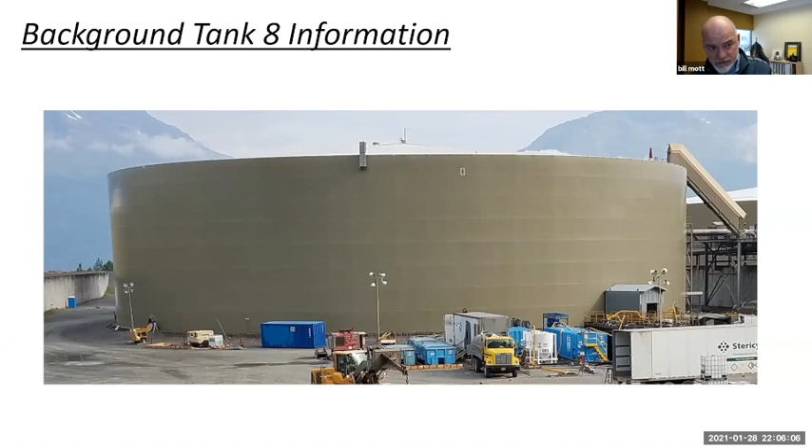Just to give you background on the API 653 inspections that are done: API is American Petroleum Institute. The standard 653 defines inspection and repair processes developed to reduce the risk of a spill or leak from an above ground storage tank, an AST.

API recommends annual visual inspections, 5-year in-service inspections, and periodic out-of-service inspections. For this study, we're referencing the out-of-service inspections. To conduct these, the tank has to be removed from service, drained, vented, and cleaned. The inspection visually assesses the columns, tank shell, tank roof, and tank floor, as well as the nozzles and some of the appurtenances on the tank.

The NDE of the tank floor garners most of the attention—it's where most of the leaks occur. NDE stands for non-destructive examination. Alyeska's floor plate inspections include mag flux leakage, which looks like an upright vacuum cleaner that runs around the tank and alarms when it sees areas of thinning. They mark that out, come back, and scan the area with ultrasonic testing, which gives a direct measurement of the remaining thickness.

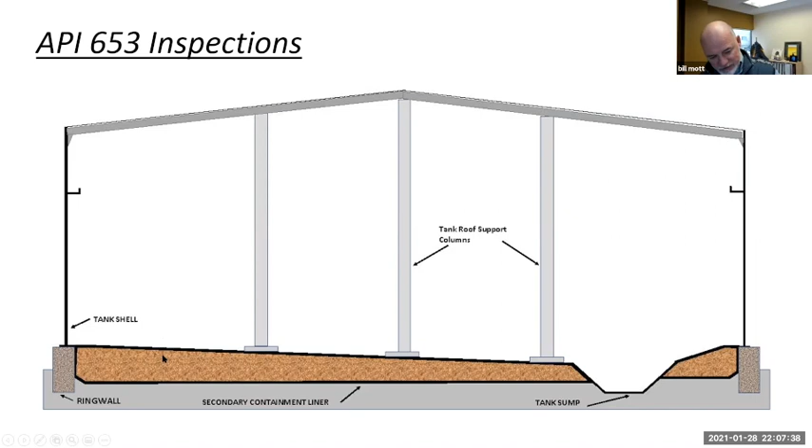Floor plates are typically repaired with an overlay patch they lay down and seal-weld onto the floor. I'm going to zoom in and look at one small area of the floor plate for a few seconds. This represents one small area of the floor plate. The original floor plate was 250 mils thick, or a quarter inch.

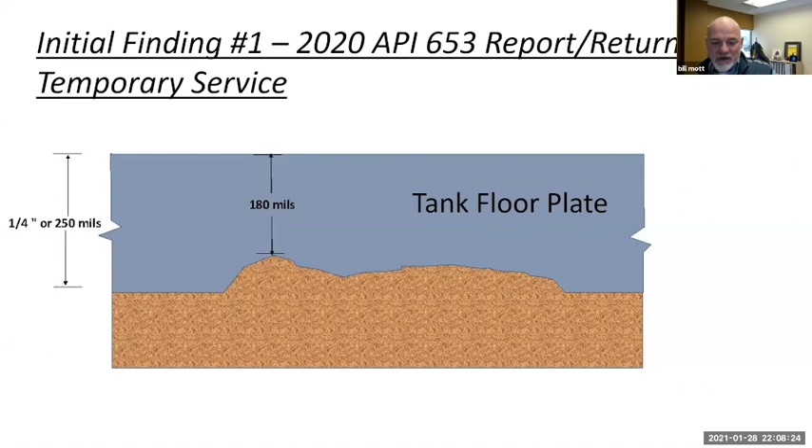The top side of the floor plate is coated, so we don't typically see any kind of corrosion activity on the tank side, the liquid side of the tank floor. The bottom side is in contact with soil, and that's where most of the corrosion occurs. The second API inspection that Alyeska conducted repaired the floor to a minimum of 180 mils remaining. So this might be what a typical remaining pit in the tank looks like—it's got 180 mils of steel left out of 250.

The code, the standard, requires that the owner plan to have at least 100 mils of floor plate remaining at the end of the next service interval. Alyeska started with 180 mils remaining to get them through to 2023, which is 4 years from when the inspection was done in 2019. So Alyeska's corrosion calculations assume the floor plate would experience 20 mils a year of corrosion for the ensuing service interval.

The reality is the actual corrosion rate on that tank has been closer to 10 or 11 mils per year. So I would expect that when they take it out of service, they're going to have somewhere in the neighborhood of 135 or 140 mils remaining on that floor. If you follow that little dotted line, that's probably what this pit would look like, but that's about what I would expect them to find when they go back in there.

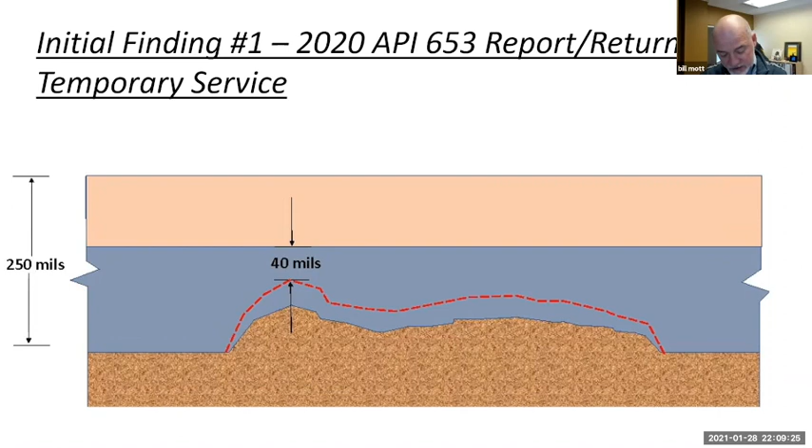So I think as long as the data was collected in a prudent manner, and everything I've seen on the second inspection suggests that it was, I think there's very little risk of a corrosion leak on that tank before it's taken back out of service in 2023.

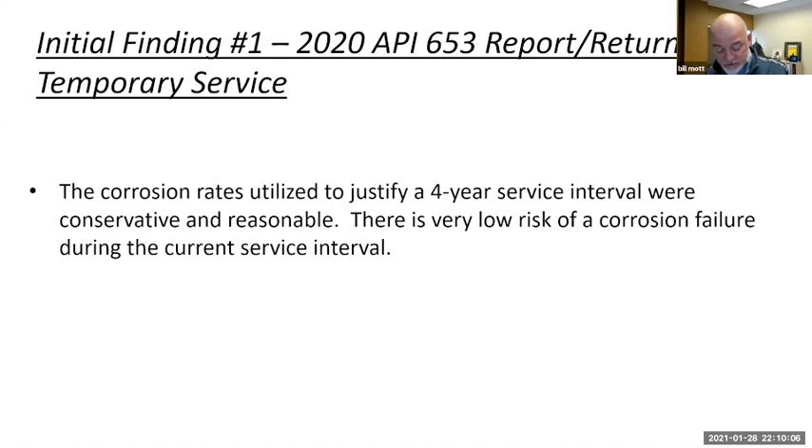One thing I didn't see: API 653 reports typically address tank settlement. There should be some perimeter assessments done on settlement, as well as internal localized settlement assessment on the floor. Especially in light of the November 2018 earthquake, I would have expected that to take a little higher profile. They may have conducted it, it just wasn't in their 653 report.

This is a simplified cross-section of what a crude oil tank looks like, one of Alyeska's. Again, it's 250 feet across. The tank shell and the tank floor plate around the perimeter rest on a concrete foundation, a ring wall. There's no seal between the plate and the wall. There's about a 3.5 foot drop between the top of the ring wall and the bottom of the sump. So that plate slopes down to the top of the sump, and the sump itself is 2 feet deep. So you end up with, it's actually 3 feet 7 inches.

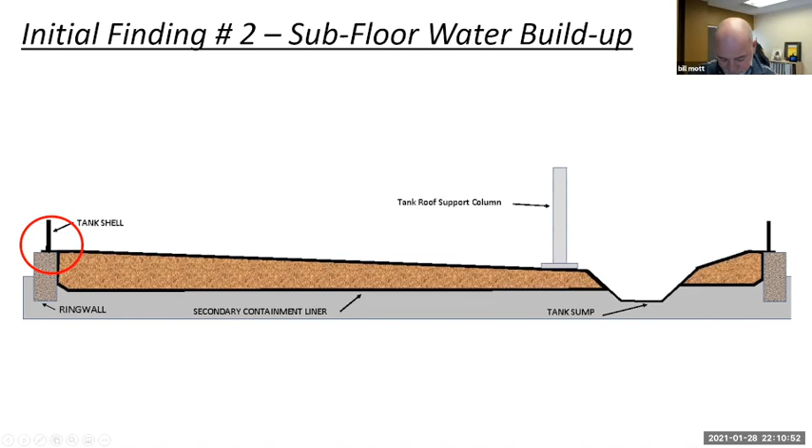So for the next couple slides, I'm going to focus on this area right here. This is supposed to represent what that area looks like, where the tank shell rests on the annular plate. It's welded to the annular plate here, the floor plate extension or annular plate extension, and that rests on a concrete ring wall. The ring wall was existing. There's no bond between the plate and the concrete.

So any water that pools on that will either slide off the side of the ring wall, or it will migrate to seep beneath the tank in between the secondary containment and the floor plate. Most operators try to avoid that, and they install a flexible grout to seal that area. So not unlike what you would put around your bathroom tub or around your windows at home.

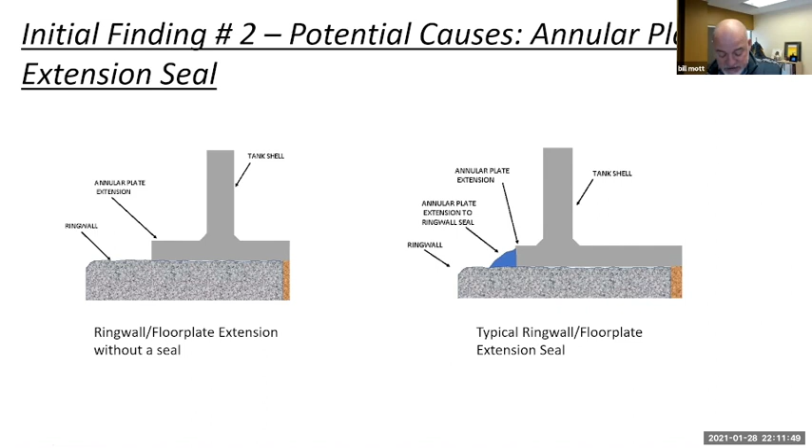If you take a cross section of that, it would look something like this. And the problem here is that water running down the tank is then almost funneled into the area underneath the tank, which exacerbates the amount of moisture that is seeping into that area.

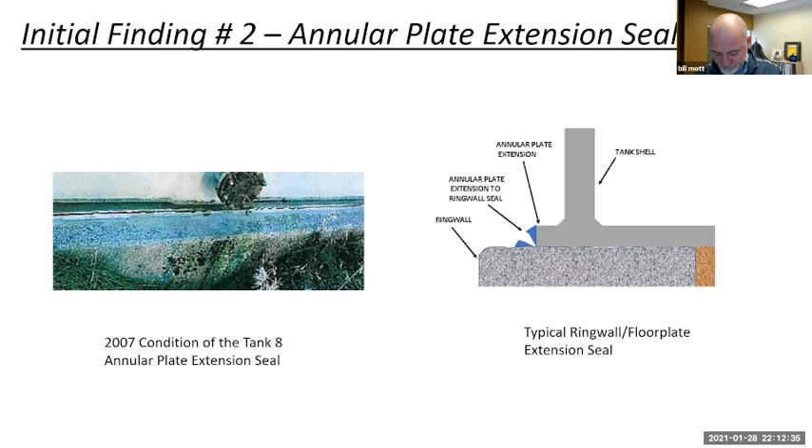And why that's a concern is, as you recall, there's a secondary containment liner beneath that. If the secondary containment liner is intact, then the soils between the floor plate and the secondary containment become saturated with water. Valdez gets 70 inches of rainwater a year. That tank is over an acre of steel up top, and all that water collects and runs down the shell of the tank. Even if only 5% of that water seeps underneath the tank, these soils will be saturated in a year and a half.

We're putting these back in service for 10 to 20 years. So for a majority of the time that they're in service, some level of water impacting that sump is present.

Now, Alyeska has installed subfloor drainage systems on these tanks in this area I'm pointing to, on some of the tanks—we don't know if they've done it on all of them—but that subfloor drainage is at this level. It's still significantly higher than the level of the tank sump, so while it alleviates some of the buoyant forces on the sump, it won't entirely alleviate it.

We actually did get a call from somebody working with Alyeska that they had some distortions on the tank column feet when they went into the tank. We've requested drawings or photos of the as-found condition of that, haven't received them yet, but we've seen that before.

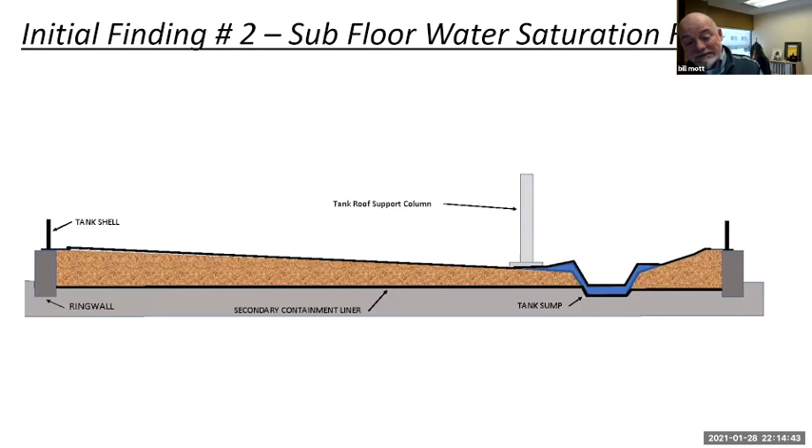There are doubler plates underneath the column pads, which helps to reduce the risk somewhat, but the risk is still inherent in there.

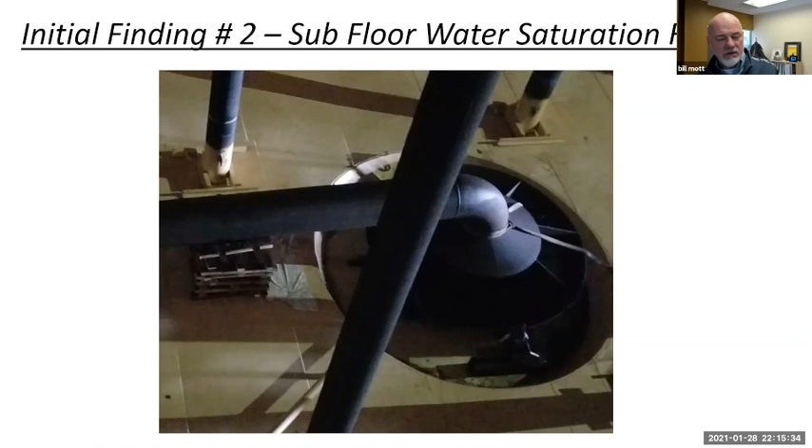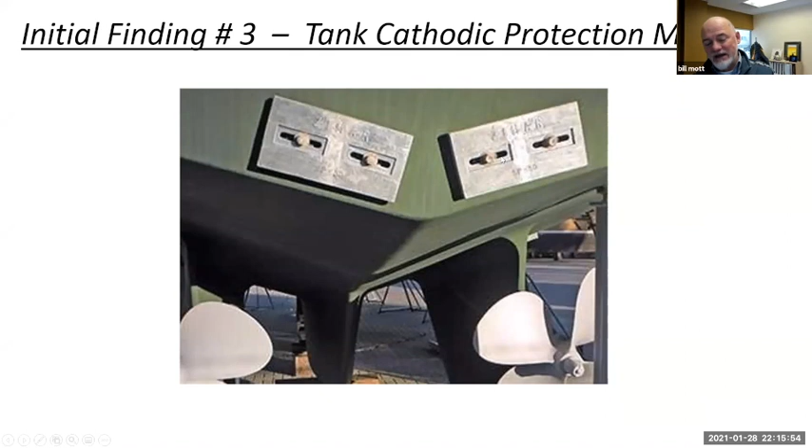Next thing I'd like to talk about is cathodic protection. Most of you are actually probably familiar with that—they use them on boats all the time. These are zincs for the back of a boat, bolted to the boat, so it's probably an aluminum or steel boat, and these are probably zinc anodes, and they provide a current that keeps the bottom of the boat from corroding. Well, tanks use the same exact science.

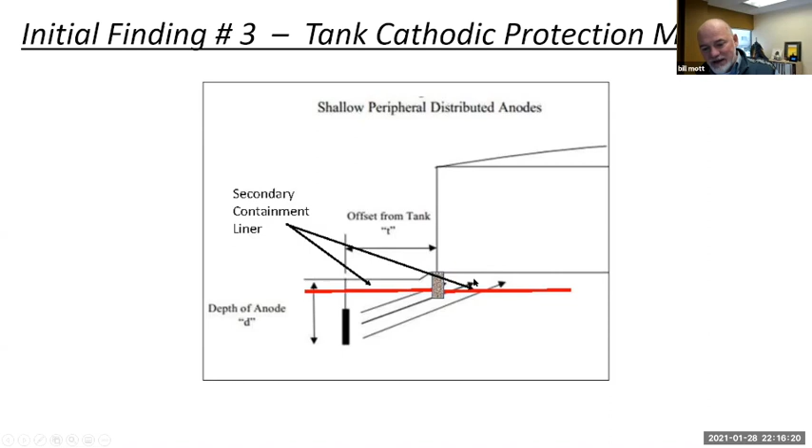Some operators are able to install perimeter anodes like this that drive current up to the tank bottom, and they can protect the tank bottom in that manner. Alyeska's got a secondary containment liner beneath that floor, which effectively blocks the distribution of current, so what they've had to do is install anodes in the space between the secondary containment and the floor. It looks something like this.

Alyeska's installed grid systems, which is mixed metal oxide ribbon that runs beneath the floor. It's connected with conductor bars, and then they actually run conductor cable back to a rectifier and provide current, which protects the floor from corrosion.

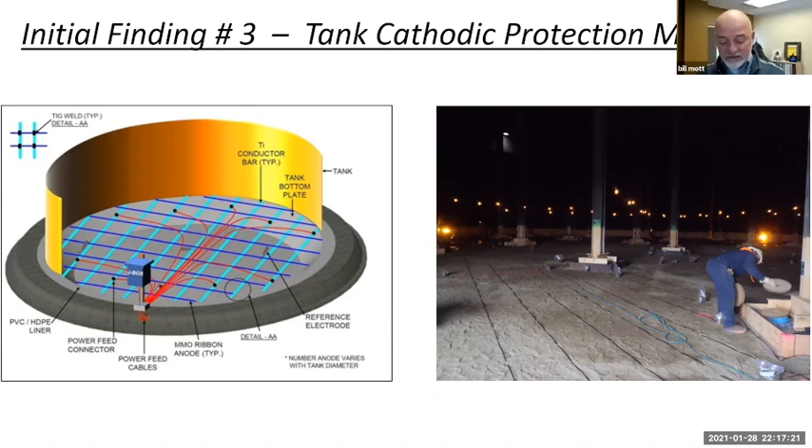CP surveys on the tanks monitor these systems through a series of monitoring tubes that run above this, between the grid and the floor, and slotted so that they can collect voltages on the floor. That's what they use to determine if the tank is in fact protected.

Alyeska and most operators worldwide follow criteria laid out by the National Association of Corrosion Engineers, or NACE. The two predominant criteria used are an IR-free potential, or an instant-off potential, of 850 millivolts, or 100 millivolts of polarization. Please bear with me, I know this is probably a little more technical than you'll want, but it's to get the point across, so I have to go through some of it.

These criteria were developed through testing, both empirical and laboratory testing. These are the conditions required to stop or dramatically slow corrosion on steel. According to NACE, the IR-free or instant-off potential can't really be more negative than 1100 to 1150 millivolts. So a good reading for a tank would be between 850 and say 1050 or 1100 millivolts. The 100 millivolt polarization requires that you measure the formation and decay of that polarization.

Alyeska historically was experiencing some issues with their CP systems on the tanks and the data collection. So in 2003, they hired a gentleman named Bob Gummow with Correng out of Toronto to assess their systems. Bob is probably the most referenced corrosion engineer in the world at this point. He's certainly the most referenced living corrosion engineer in the world. He's very highly respected and known throughout the industry.

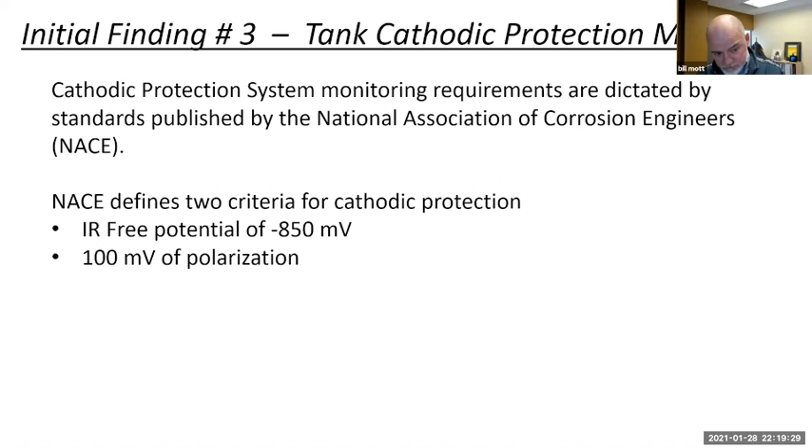The 2016 to 2018 data that we were provided for tank 8 suggests that this tank was very well protected from corrosion when related to the 100 millivolt criteria. Everything met the 100 millivolt criteria. The lowest was 131 millivolts of polarization, and the highest was 585.

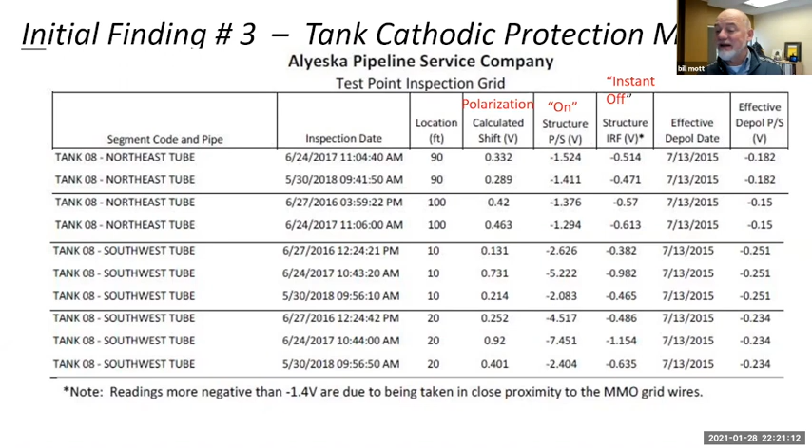There are several issues. First, this is the depol data — it was collected in 2015. The standard requires that you use the formation or the decay of polarization to determine whether you have 100 millivolts of shift. Typically what they do is measure the depol, subtract it from the instant off reading, and that gives them this number. In this case, 332 — that should be great. But this was collected in 2015.

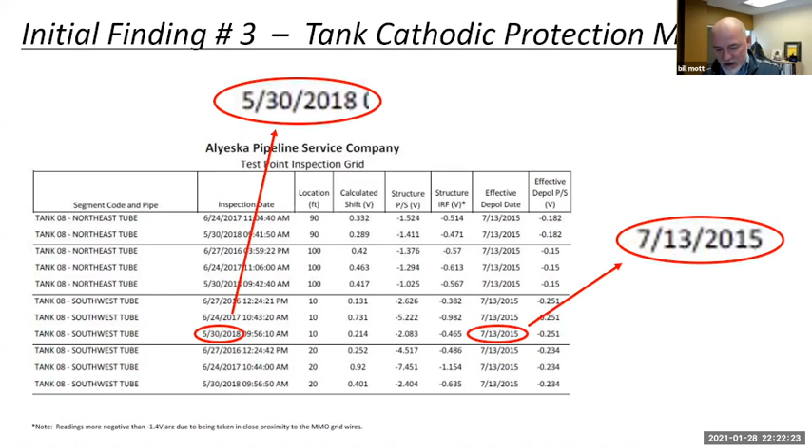This one was collected in 2018. The instant off data was collected 1, 2, and 3 years later. The depol readings change over time due to moisture content, temperature, soil chemistry, and actually the application of CP impacts the depol reading. So the fact that you have a CP system on will change this reading, which is why you have to collect it at essentially the same time as your instant off reading. That's why the code or standard requires you to measure that formation or decay. And that's not what's being done.

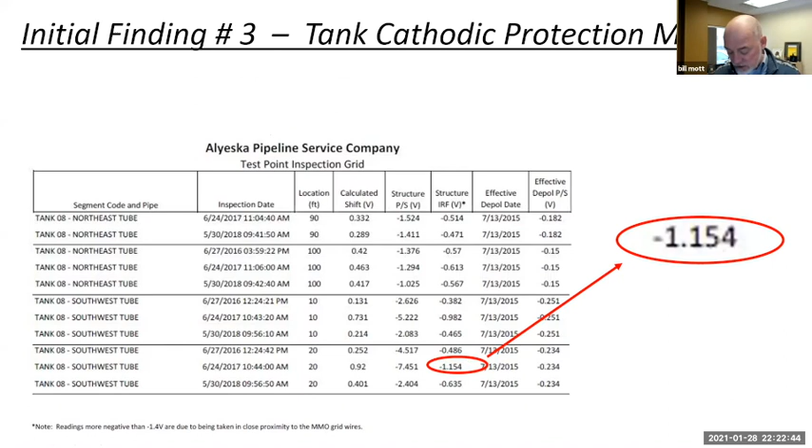This is pulling out some of their instant off data. It's not terribly negative — it's more negative than what NACE suggests would be reasonable. It's negative enough that it should have thrown a flag to the operator to take a second look and dig into things a little bit more.

I looked at the tank in the very same tank cell, tank 7. It's adjacent to tank 8. It's monitored by the same personnel using the same techniques and procedures, and they're reporting IR-free data of up to 2.7 volts. This is just an excerpt, and these are up in that neighborhood. These are voltages — these cannot be achieved. It's not physically possible to polarize steel to that level. So there's even a novice error here.

But as Bob Gummow noted, and as we agree, even in the areas where the error isn't as obvious, it's still undeniably an inherent part of that number. So it calls into question all of the data that's collected in this manner, at this time, and in this manner.

And keep in mind that the IR-free data is what you subtract the depol data from to get the calculated shift. So if this data is bad, then the data you're using to compare against 100 millivolt is also in error.

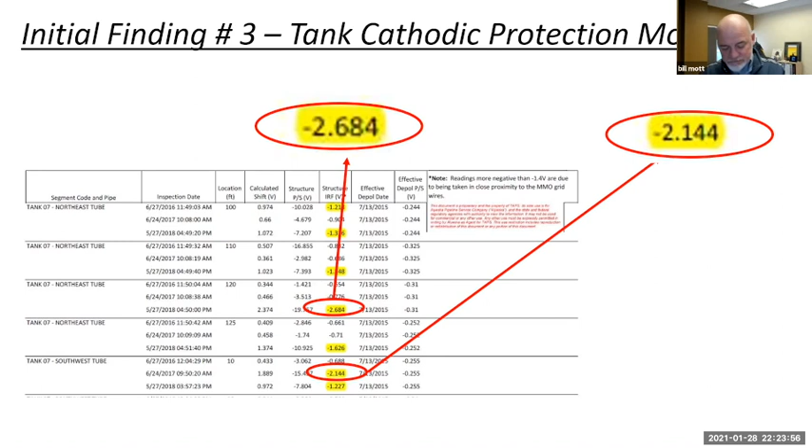These are well beyond what Bob Gummow and NACE and we agree could be normal. Alyeska obviously realizes that there's some errors in their data, and they've caveated the data with this note that readings more negative than 1.4 volts are due to being taken in close proximity to the mixed metal oxide grid.

In my professional opinion, that reasoning is flawed. You're interrupting a current. Any electrical field around that grid should collapse, and it shouldn't impact the reading. But regardless of what's causing the error, they're admitting here that there's an error with the data.

What they're not picking up is that even if there's an obvious error in this data, there's an inherent error in all of the other data collected at the same time, because you've got an interference issue, some other influence. To our knowledge, Alyeska is still collecting the CP data in the same way, despite the conclusions that their consultant, Bob Gummow, provided them 17 years ago.

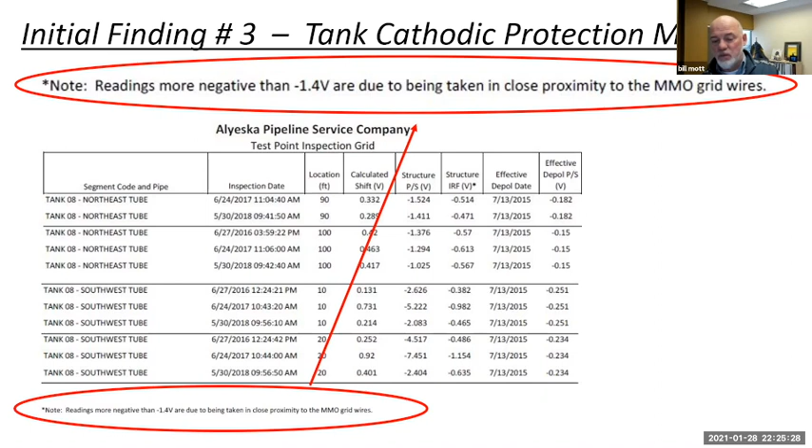These are inherent systematic errors in Alyeska CP data that leave the operator with a false sense of security, believing their tank is protected, when in fact, like on tank 8, they're experiencing an elevated corrosion rate, despite what should in fact be a well-protected tank.

I want to take a look and talk a little bit about their tank secondary containment systems. These are liners that run beneath the floor, under the sump, all the way up to the ring wall. They're battened down. It should be tight.

Alyeska has been experiencing water accumulation beneath some of their tanks for more than 30 years. However, there's other tanks that are not accumulating any water.

None of the annular plate extension ring wall seals have been maintained on any of the tanks. They're all subjected to 70 inches of rain a year. Some of them had subfloor drainage systems, and some of them, we don't know if they all do, but again, that alleviates some of it, but it doesn't alleviate it all.

Those drainage systems are located significantly above the elevation at the bottom of the sump. So it brings to question why some tanks are retaining water and some others aren't. The only conclusion I can come to is that there's a fault in your secondary containment liner.

I think in light of that, a more comprehensive assessment of the tank subfloor secondary containment is warranted. Alyeska has done some isolated looks of that in the 90s, but I don't believe, to my knowledge, they've comprehensively assessed those to see how tight they are.

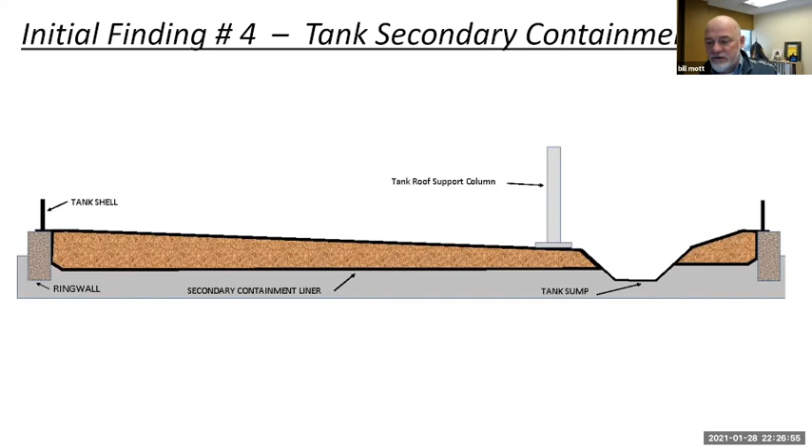In summary, regarding the tank 8 return to temporary service, I think the approach they took was pretty conservative. I think the corrosion rate they used was quite conservative. There's a very low risk that you're going to have a corrosion problem in the floor of that tank before it's removed from service in 2023 for a new floor and a new CP system.

Regarding subfloor water accumulation, tanks that have competent secondary containment liners are going to retain water and have saturated soils at least up to whatever drainage system they have, or to the ring wall if they don't have a drainage system.

Either way, there is some level of buoyant forces that are acting on that sump. It's negated when the tank is full and you've got the hydrostatic head of the oil pushing down. But when the tanks are empty, that's a risk.

Regarding cathodic protection, Alyeska's CP system is not being conducted in accordance with industry standards that are used worldwide. There are just inherent systematic errors with the data that they're reporting that leave the operator, regulators, and frankly, the general public with a false sense of security.

You're led to believe that these systems are protecting the floor. And the fact of the matter is, we see with tank 8, it's actively corroding. They're not being operated effectively.

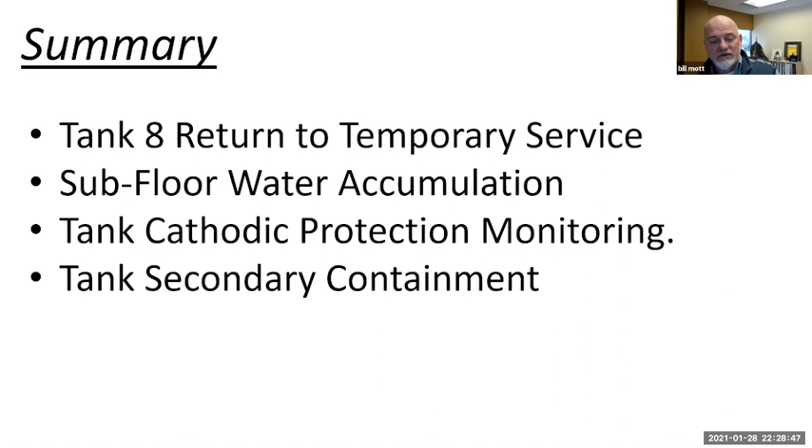Our next steps, we're still pending data. We're awaiting the balance of the data that we requested from Alyeska in June of last year. Pending receipt, we will complete a final report that'll include conclusions and recommendations going forward.